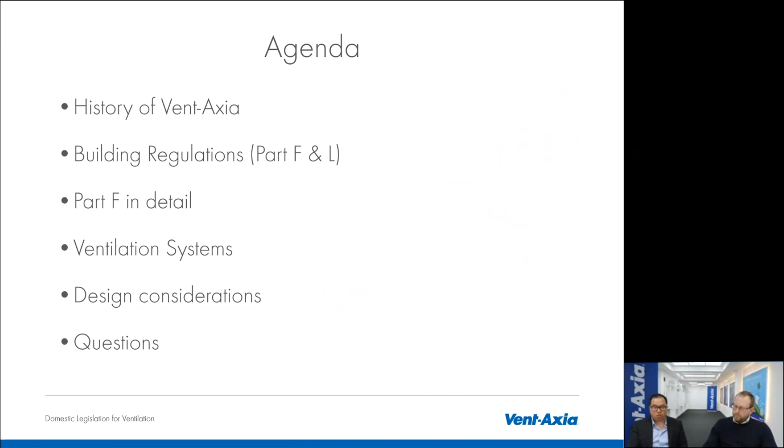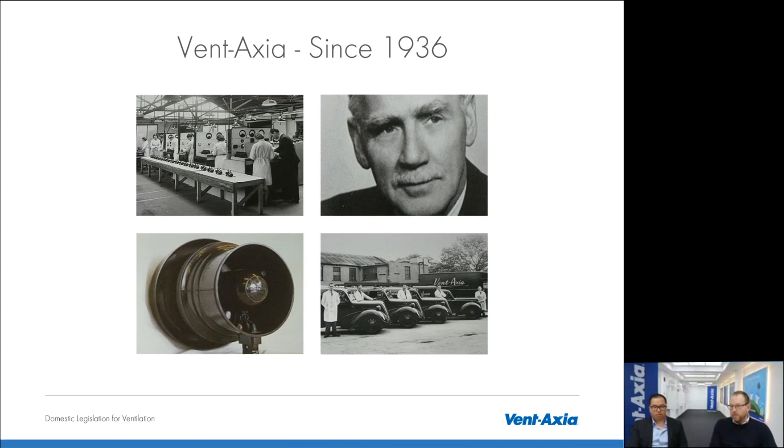And today, now called Vent-Axia, we continue to improve the indoor environment for our customers. Vent-Axia is a proud UK manufacturer, producing products across 3 UK sites for the UK and export markets, with our goal of improving the indoor air quality for our customers. Our manufacturing facilities across the UK are located in Crawley, Dudley and Reading.

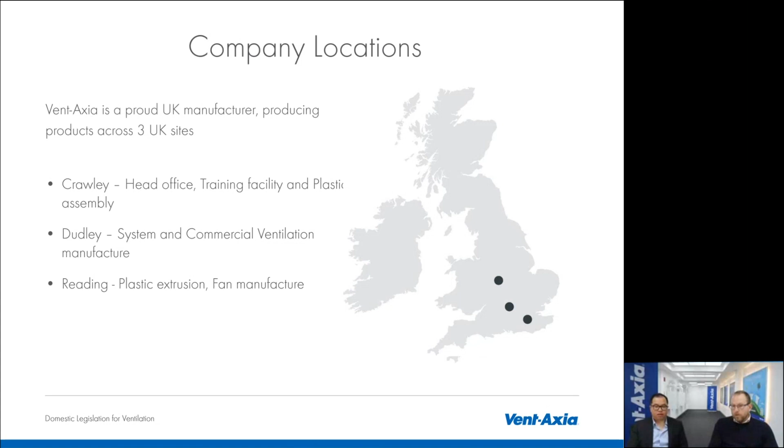Historically, building regulations across the United Kingdom were combined, but this has now changed to having each constituent country have their own versions of the building regulations. England were the first to publish their latest building regulations. We expect the other countries to follow shortly, with each now having finished their consultation periods, and we look to publish their documents within the next year. Once these are published, we will look to update this presentation to include them.

Moving on to the building regulations, specifically Part F for ventilation and Part L for conservation of fuel and power, we'll be looking at Volume 1, which applies to dwellings, such as residential. There is also a Volume 2, which applies to buildings other than dwellings, such as commercial. This will be covered in a future webinar.

The new 2021 edition of Part F, L and O take effect on the 15th of June 2022 in England. This means any new applications following this date will need to meet the 2021 edition. Any applications made prior to this date will be applicable for a 12-month grace period which ends June 2023. Following this, each individual plot must follow these regulations in order to comply.

Historically, building regulations applied to each site, multiple houses, and this is now changed to being specifically applicable to each plot, i.e. individual houses. This means that if a site designed to previous regulations hasn't started every plot by 2023, any remaining plots would need to be redesigned to meet the 2021 edition.

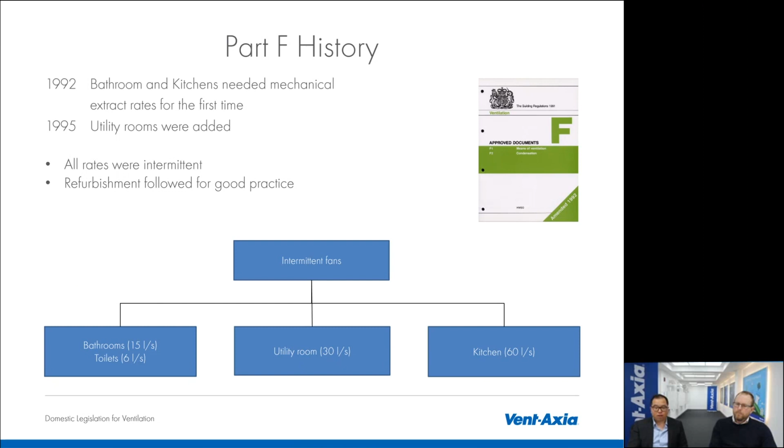This not only applied to new build developments, but refurbishment projects also follow this document as good practice if building control was involved. The minimum extract rates meant that generally, to suit application, 100mm diameter fans were used in bathrooms and toilets, and 150mm fans were used in utility rooms and kitchens.

In 2006, Part F introduced continuous whole house ventilation systems and became more focused around performance. There were 4 different types of systems that would meet this compliance: intermittent fans and background ventilators, known as System 1, passive stack, known as System 2, mechanical extract ventilation, known as System 3, and finally, mechanical ventilation with heat recovery, known as System 4.

Part L, conservation of fuel and power, was also introduced. This gave rise to fan systems having minimum specific fan power requirements, starting to drive energy efficiency into the systems. Part L was split into L1A for new builds and L1B for refurbishments.

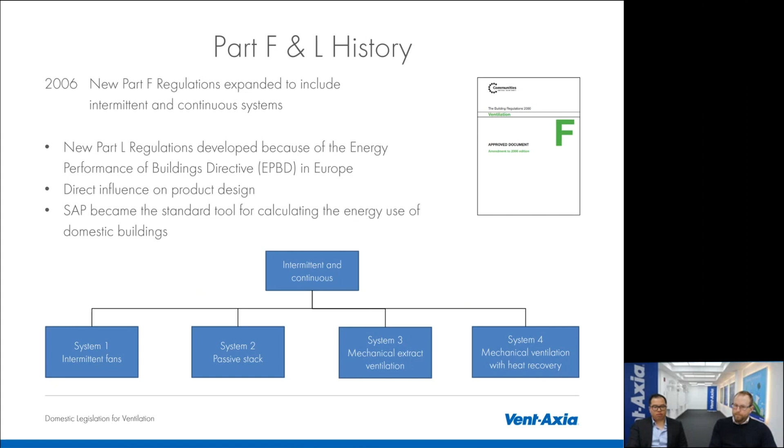In 2010, Part F was updated to include reference to the Domestic Ventilation Compliance Guide, which introduced a requirement for commissioning of systems and compliance documentation, creating a more stringent process for ventilation. Part L, heat recovery efficiencies were increased, minimum SFP targets were lowered, pushing for further energy efficient systems. Alongside this, there were also industry guides and good practice guides to ensure compliance and best practice was followed for installations.

With the introduction of the 2021 edition, the main focus is health and energy efficiency, which we see as a positive move following the COVID-19 pandemic. The regulations look at minimising entry of external pollutants, ensuring humidity and pollutants are extracted effectively and efficiently, and setting minimum levels of fresh air to ensure good occupant health. The approved document references a number of industry guides and codes of practice and standards published by organisations such as CIBSE and BRE.

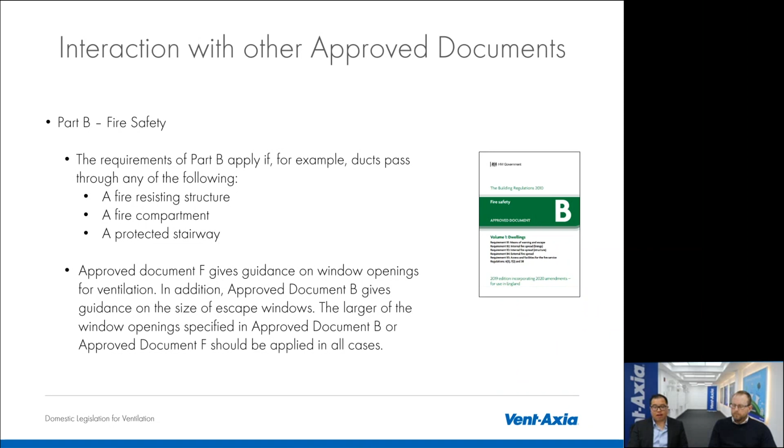Approved document F interacts with other approved documents. Part B is all about fire safety. This applies to ducting and penetrations through walls and fire structures. Part B also gives guidance on escape windows and openings, which may well be larger than those required for ventilation in Part F and should take precedence. If in doubt, always consult the fire officer.

Interaction with Part J, which covers combustion appliances and fuel storage systems. Part F cannot supersede Part J when permanently open air vents are required for combustion, as ventilation fans may cause combustion gases to spill from open flued appliances.

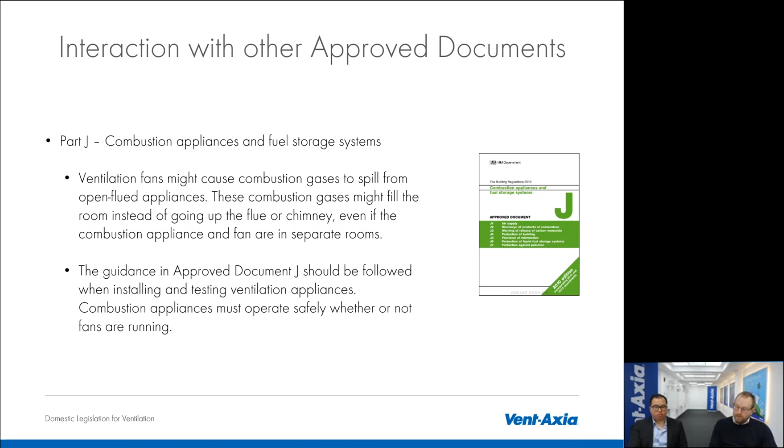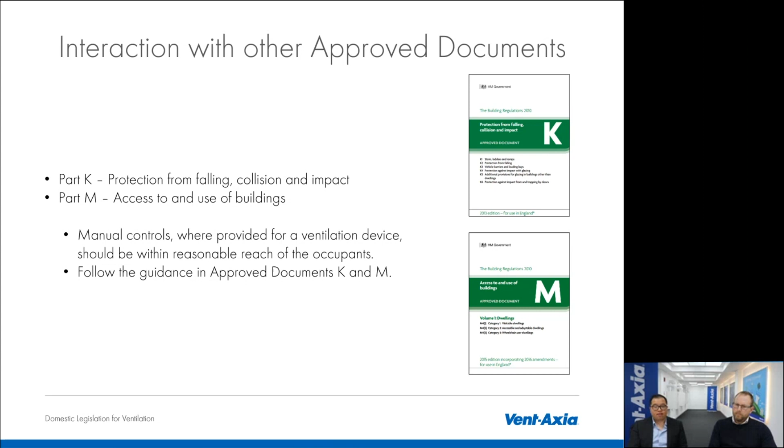Interaction with Parts K and M, which cover protection from falling, and access to and use of buildings, which states that controls should be within reasonable reach of occupants.

And finally, Part O, which covers overheating. This is a new approved document introduced in December 2021. This can impact the purge ventilation rates, which may exceed those found in Part F to manage the rapid dilution of pollutants. The higher of the two standards should be followed.

There is also a manual to the building regulations, which provides further history and guidance on the various interactions across all the approved documents.

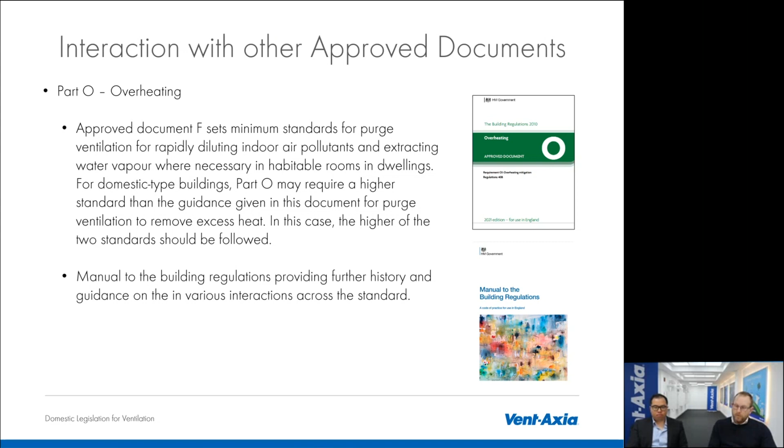We now move on to the details of approved document F, volume 1. The various ventilation systems within Part F are no longer classified between the systems 1 to 4.

So there are now 3 types of prescribed ventilation systems, with passive stack now removed. Other systems, such as positive input ventilation, also known as PIV, may be used to comply, but expert advice should be sought.

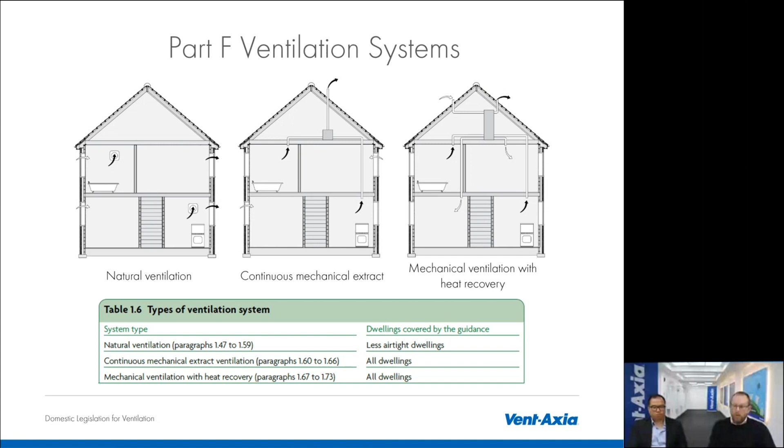In the drive to reduce the energy consumption of buildings, focus has been around improving the fabric insulation levels, reducing heat loss through ventilation, and increasing the building air tightness. How airtight the building is has an impact on its energy use, and these changes to the guidance introduce the requirement that all buildings must be air tightness tested.

As per approved document F, houses are now classified as less airtight or highly airtight, depending on the air permeability, which is measured using metres cubed per hour per square metre.

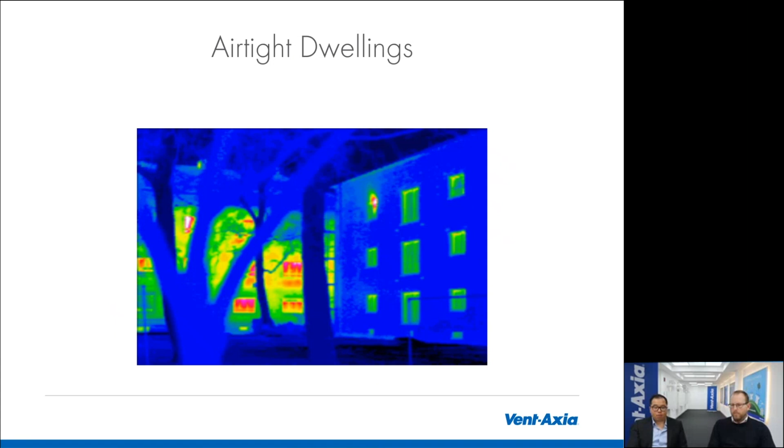The minimum air tightness of a building is 8 metres cubed per metre squared at 50 pascals, which is reduced from 10 in the previous guidance. If the air tightness is greater than this, the building will not comply.

If a dwelling designed with natural ventilation tests as highly airtight, which is an air permeability of 3 or less, expert advice should be sought, or a continuous mechanical extract ventilation should be installed.

We recommend that intermittent extract fans be used between 8 and 5, with decentralised mechanical extract ventilation systems between 5 and 3, and anything below 3 should be mechanically ventilated with heat recovery.

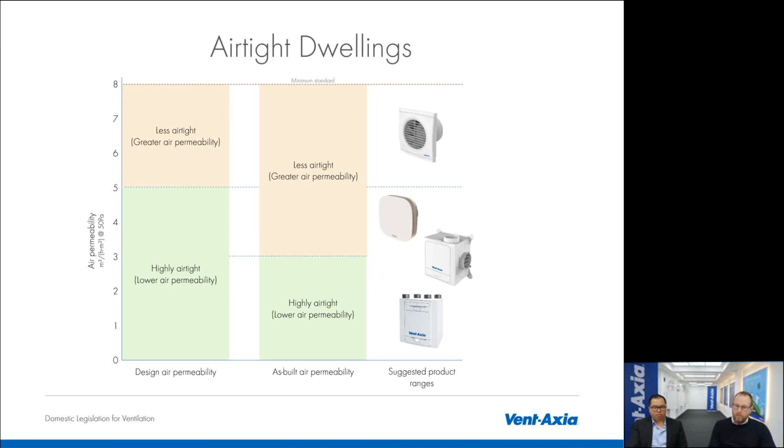The minimum intermittent and high extract rates between the 2013 and 2021 editions remain unchanged and are presented within Table 1.1 and 1.2. For intermittent systems, these are 60 or 30 for a kitchen, 30 for a utility, 15 for a bathroom, and 6 for a toilet.

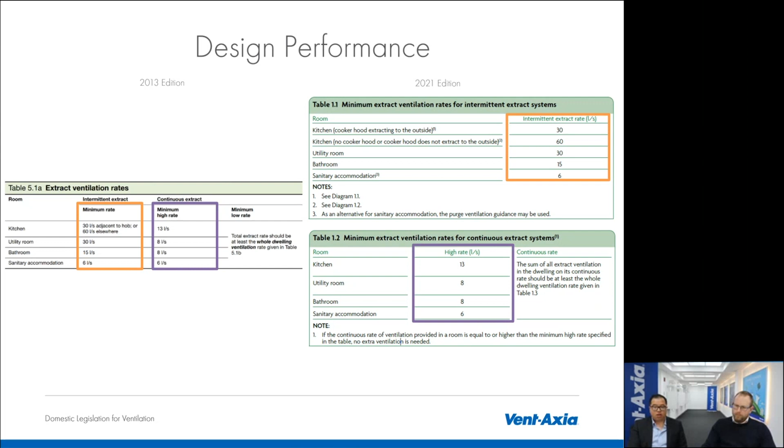For continuous systems, these are 13 for a kitchen, 8 for a utility or bathroom, and 6 for a toilet.

These new figures are based on 2 occupants in the master bedroom and 1 in subsequent bedrooms. In addition to these changes, the minimum ventilation rate should not be less than 0.3 litres per second per metre squared of internal floor area, including every floor. The higher of the 2 values calculated should be used.

If the house rate exceeds the high extract rate, there is no specific requirement for boost speeds to be increased above the whole house rate, but dependent on various factors such as lifestyle, you should consider a minimum of 10% boost. Also to note, one habitable room, for example a bedsit or studio, would fall under one habitable room and would need to meet the minimum ventilation rate of 13 litres per second.

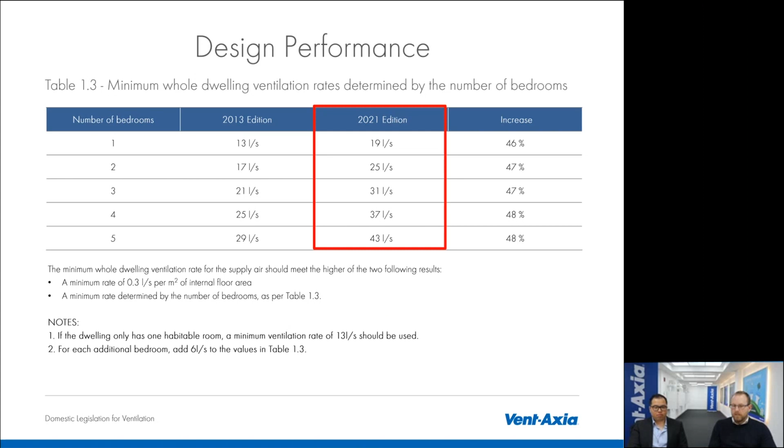There continues to be a requirement to have a summer bypass and variable speed control for supply and extract ventilation systems. Within SAP, the notional buildings will use natural ventilation with intermittent extract fans.

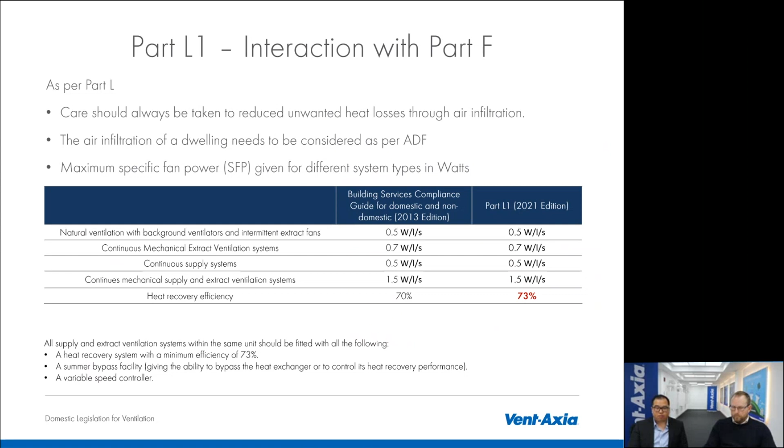Natural ventilation with background ventilators and intermittent extract fans is suitable for less airtight dwellings, formerly known as System 1. Intermittent extract fans should be fitted in all wet rooms with correctly sized background ventilators, also known as trickle vents.

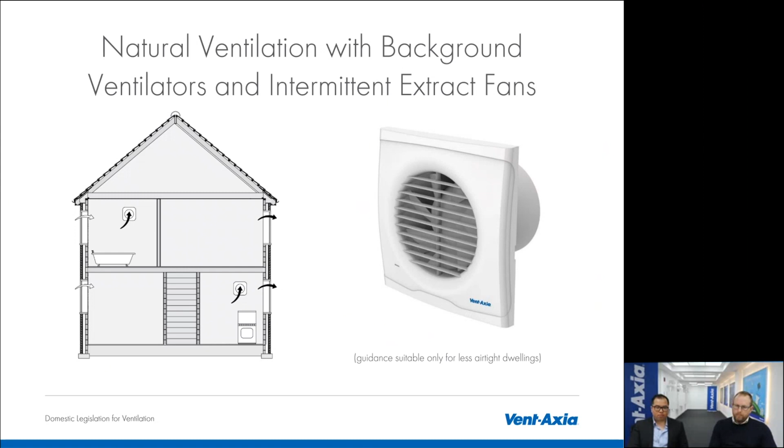Here is an animation of natural ventilation. As you can see, there are background ventilators which allow air to infiltrate into the building. In this example, they are integrated within the windows. Intermittent extract fans are located within the wet rooms, the bathroom and the kitchen, and are only operated either by manual override or automatic controls, such as an integral humidity sensor. These then allow the moist and stale air to be extracted to the outside.

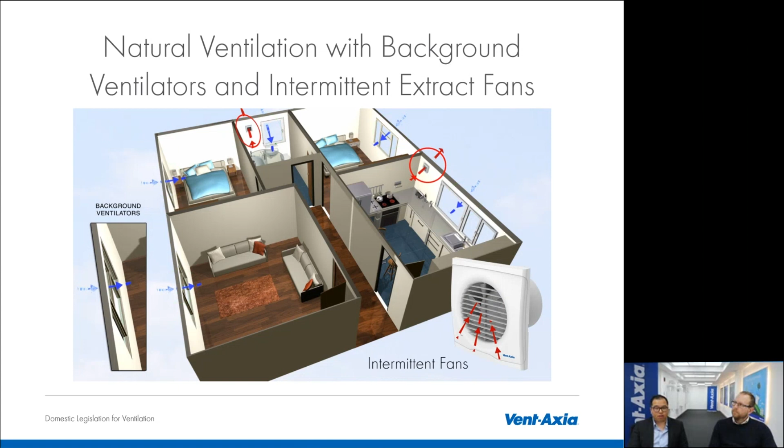Extract rates are unchanged, but key points to be aware of: if a wet room has no external wall, the fan should extract at 4 air changes per hour in order to meet the Purge Ventilation standard. It should be noted that for larger wet rooms, this may exceed the minimum extract rate. For example, an internal bathroom of 15 meters cubed would need a minimum intermittent rate of 60 meters cubed an hour or 16.7 liters a second.

Any automatic controls, such as humidity control, should have a manual override to allow occupants to turn the extraction ventilation on or off. And if no windows are present, the fan should be provided with controls which continue to operate for at least 15 minutes after the room is vacated.

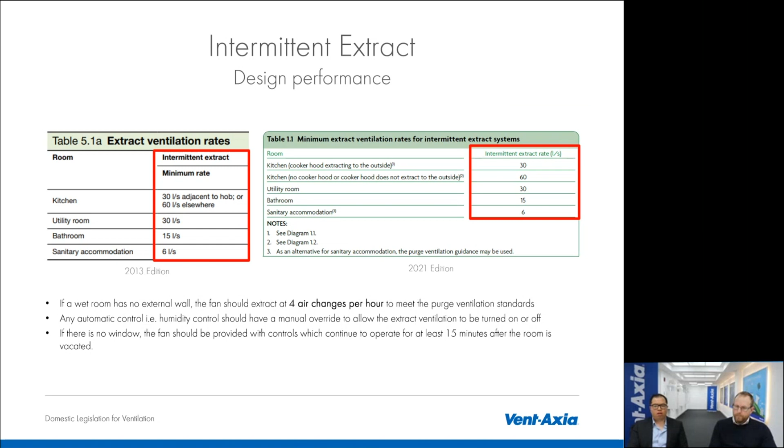Background ventilators are now defined by single-story or multi-story. There is a 20% increase in area for habitable rooms and a 60% increase in area for kitchens. Fans and background ventilators should be at least 500 millimeters apart if installed in the same room, and if an external facade faces an area of sustained and loud noise, an attenuating background ventilator is needed.

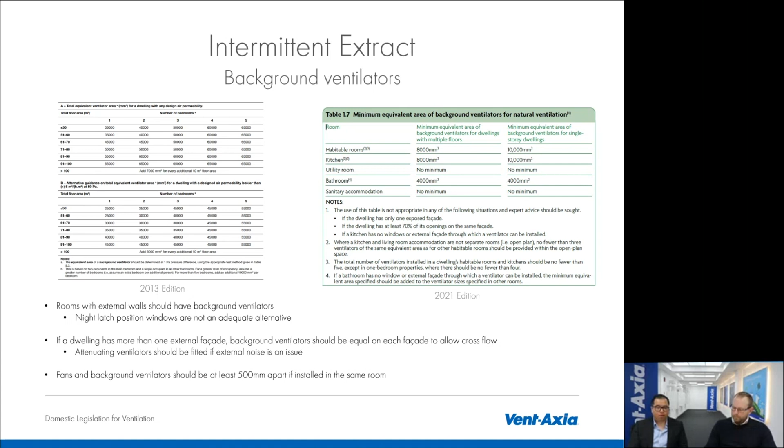The key note to be aware of is that background ventilators are not recommended in dwellings with only one exposed facade, or if a dwelling has at least 70% of its openings on the same facade. This will mean that apartments will likely need to move towards mechanical extract ventilation or mechanical ventilation with heat recovery.

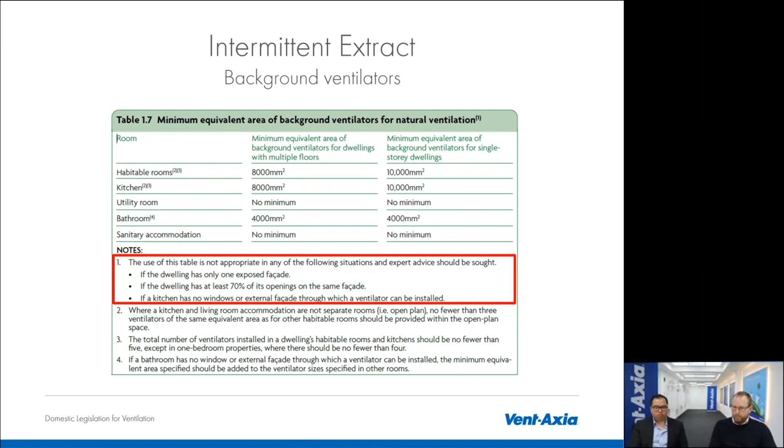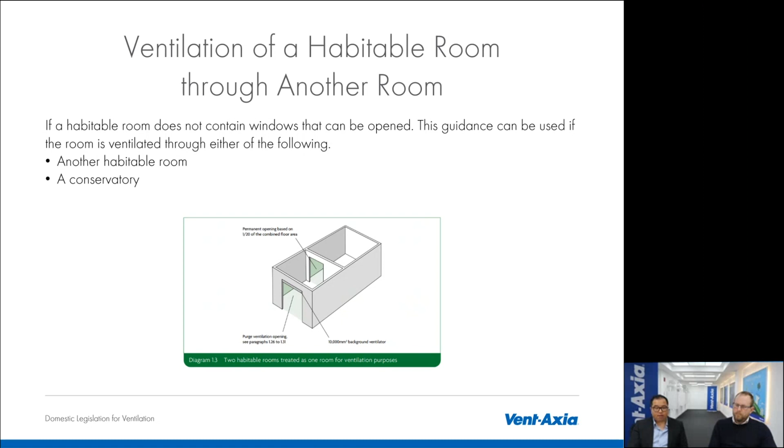If there is a habitable room that does not have any windows, you will need to ventilate through another room. In order to comply with this, there should be a permanent opening between the two rooms of at least 1/20th of the combined floor area of the two rooms. A background ventilator of at least 10,000 millimeters squared equivalent area, and purge ventilation, should be present. This will also apply to continuous mechanical extract ventilation.

A system for purge ventilation is required in each habitable room to remove high concentrations of pollutants from occasional activities, for example painting. Purge ventilation should be capable of extracting a minimum of 4 air changes per hour per room directly to outside. Purge ventilation should be delivered through either openings such as windows or doors, or a mechanical extract system. Where purge ventilation is delivered through openings such as windows in a habitable room, the minimum openable areas specified in table 1.4 should be achieved.

There are minor changes compared to the 2013 editions, where previously it distinguished between doors and windows. These have now merged into the table we now know as 1.4. Purge ventilation applies to all ventilation system types within Approved Document F.

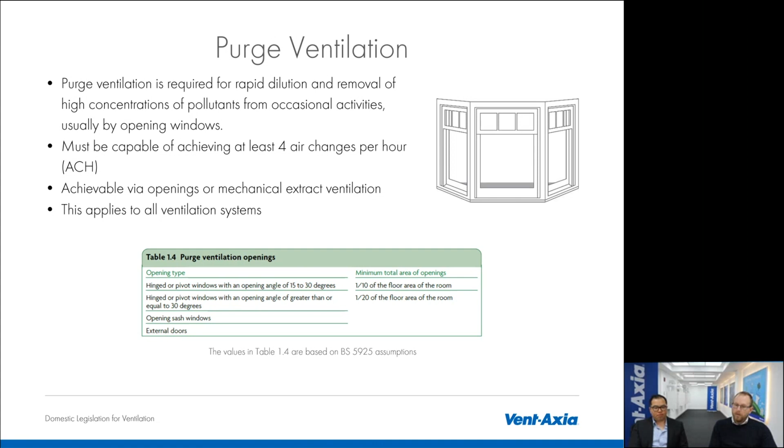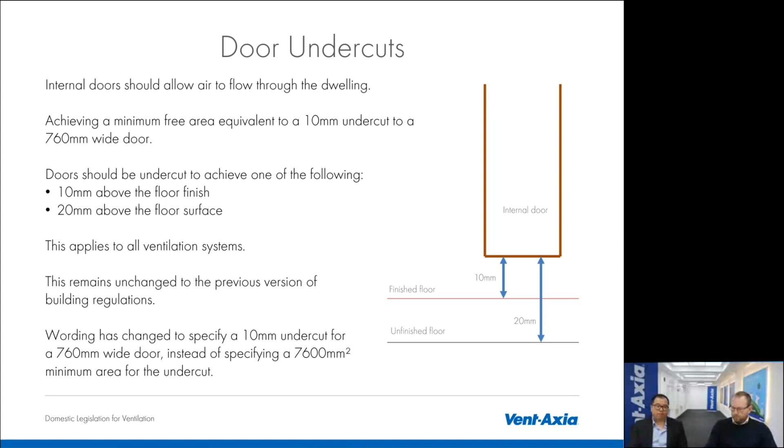We move on to the next type of ventilation system, which is continuous mechanical extract ventilation, which can be achieved through two different types of system or a combination of such: decentralized mechanical extract ventilation (DMEV), which is a standalone continuously running extract fan installed within the wet rooms, or continuous mechanical extract ventilation (MEV), which is a remote fan installed in a loft or cupboard which continuously extracts air from the wet rooms via ductwork. There is no opportunity for heat recovery with either decentralized MEV or centralized MEV.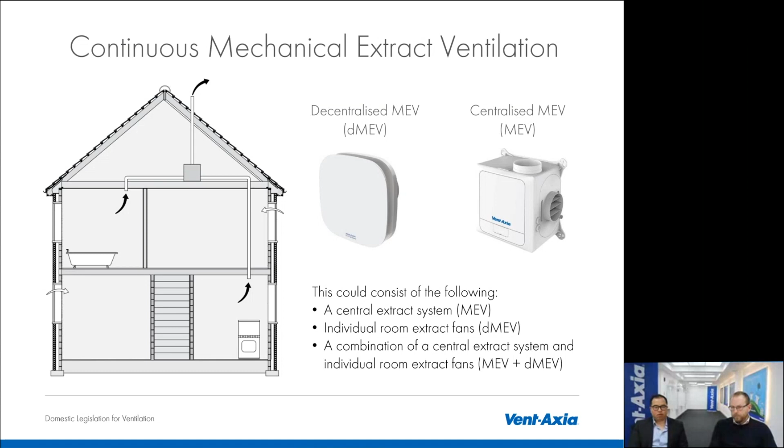Here is an animation of decentralized mechanical extract ventilation. Similar to intermittent extract fans, there are background ventilators which allow air to infiltrate into the building. Please note these are only installed within habitable rooms and not the wet rooms. With the constant running fans located in the wet rooms, these fans operate constantly at a lower speed to ensure consistent removal of moist and stale air.

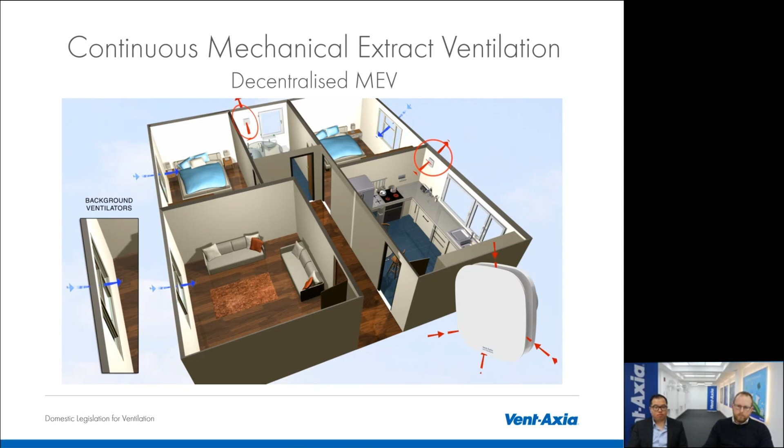Here is an animation of a centralized mechanical extract ventilation system. Again, we have background ventilators which allow air to infiltrate the building. Valves and ductwork are located within the wet rooms, which allow the MEV to draw the moist and stale air through the ductwork and then to outside.

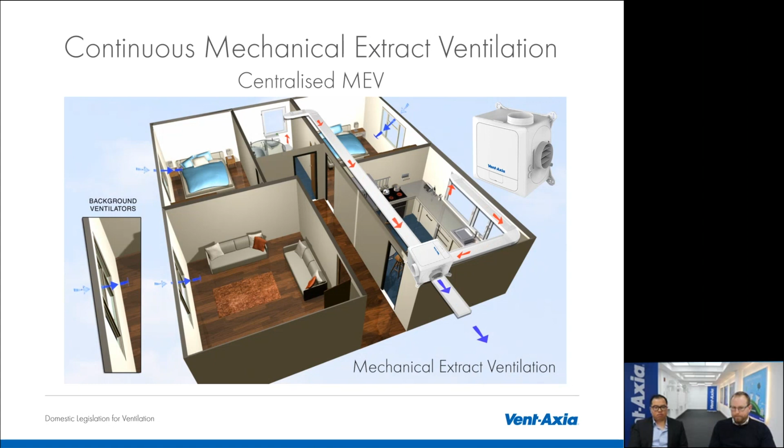For MEV and DMEV systems, we have to look at a high boost rate and also a continuous rate. The minimum high extract rate is defined in litres a second for each of the wet rooms. For kitchens, it's 13 litres a second. Utility and bathrooms are 8 litres a second, and in sanitary accommodation, 6 litres a second.

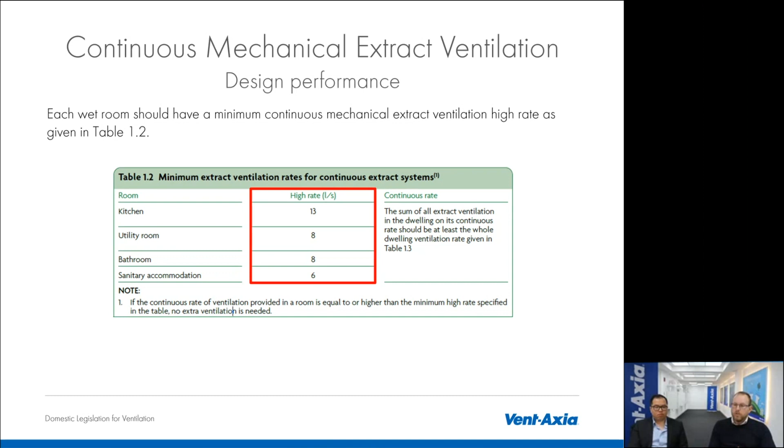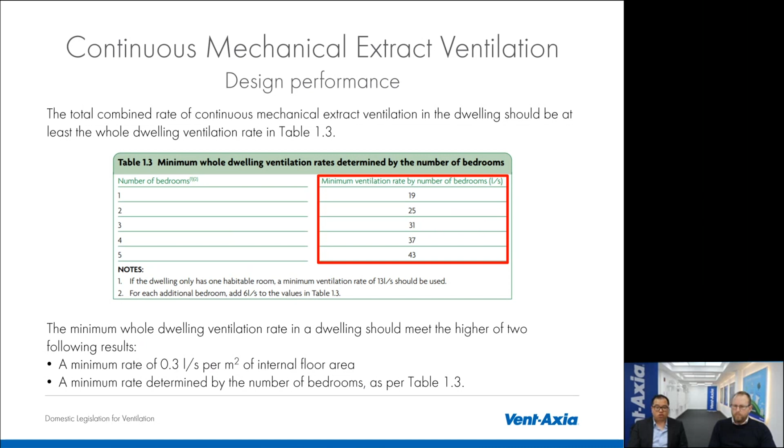The continuous extract rate has to be calculated in 2 ways, and the larger of the 2 volumes will be used. Step 1 is to obtain the rate from the number of bedrooms. Step 2 is to multiply the total floor area of the property by 0.3 litres per second. Should the continuous rate be higher than the minimum high rate, then the continuous rate should be used for the boost as well. There is no need to increase the speed to give any additional boost. However, dependent on various factors, such as lifestyle, you should consider a minimum of plus 10% boost.

Background ventilators should be installed in the habitable rooms, but should not be installed in the wet rooms. When installed in each habitable room, they should have a minimum size of 4,000 millimeters squared. It should be noted that there needs to be a minimum number of ventilators in the property, which equals the number of bedrooms plus 2.

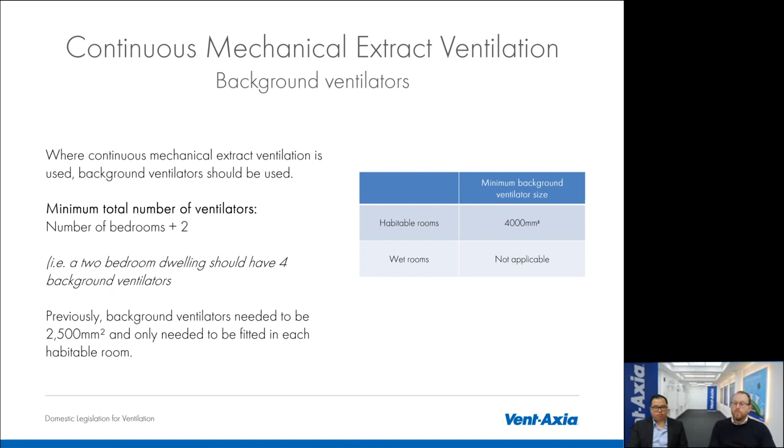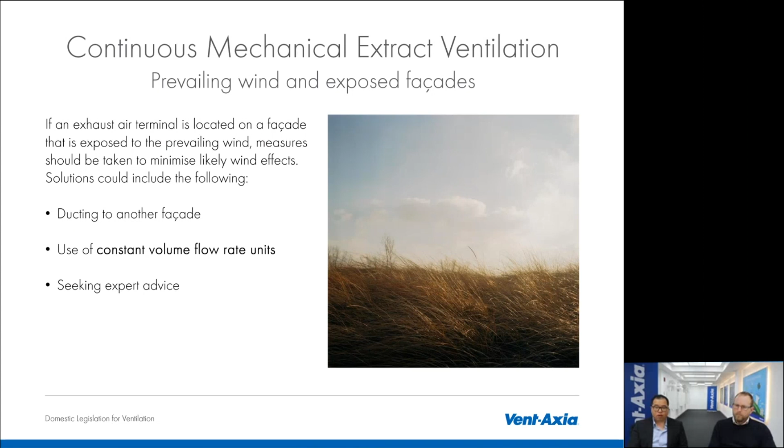A point to consider is prevailing winds and exposed facades. This can be combated with any of these points. The best solution is to use constant volume fan units in scenarios where ducting to an alternate facade is not practical.

We move on to the final ventilation type within approved document F, which is mechanical ventilation with heat recovery, MVHR. MVHR is a whole dwelling ventilation system that supplies and extracts air continuously at a low rate, with the option to increase airflow rates for boost as and when required.

The unit is typically installed in a loft space or a cupboard and is connected onto rigid ducting, which supplies fresh filtered air to the habitable rooms and extracts stale polluted air from the wet rooms. The unit incorporates a polymer heat exchanger that recovers energy from the stale moist air and tempers the incoming air before it is delivered into the habitable rooms.

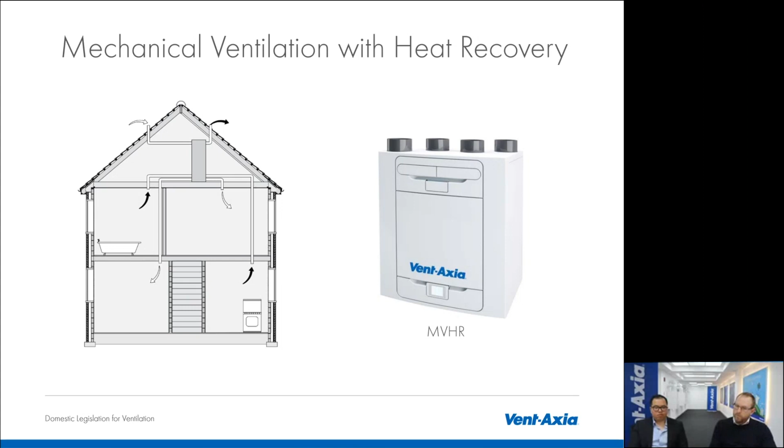Unlike intermittent extract and continuous mechanical extract, background ventilators are not required. Stale and moist air is removed from the wet rooms via the ductwork, which is then extracted to the outside. Simultaneously, fresh air is drawn in from the outside, passes through the heat exchanger where it recovers energy and is then supplied to the habitable rooms. We recommend that the ductwork that is from the unit to atmosphere or installed within an unheated space is insulated to prevent condensation forming.

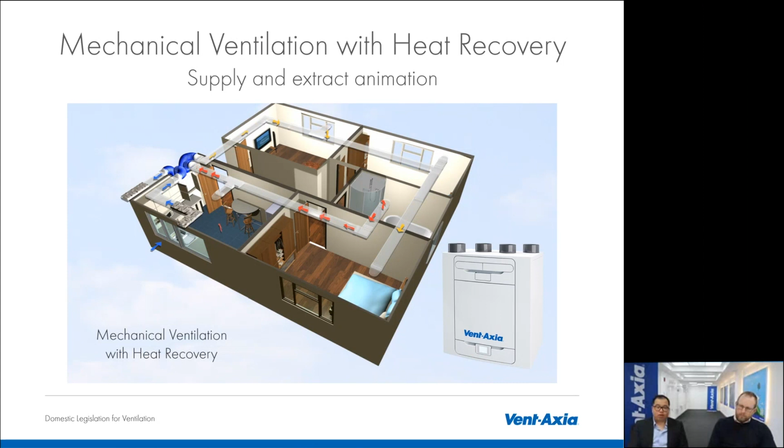For an MVHR system, we have to look again at the high boost rate and also a continuous rate, just as we did for the MEV and DMEV systems. The minimum high extract rate is again defined in litres a second for each wet room. Kitchen, 13 litres a second, utility and bathroom, 8 litres a second, and the sanitary accommodation again, 6 litres a second.

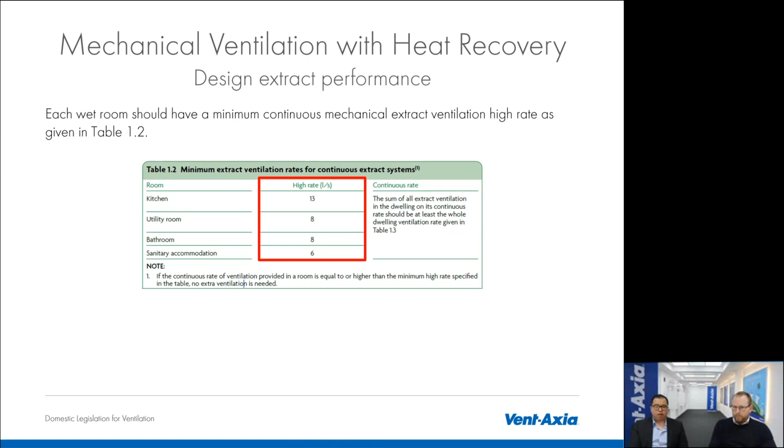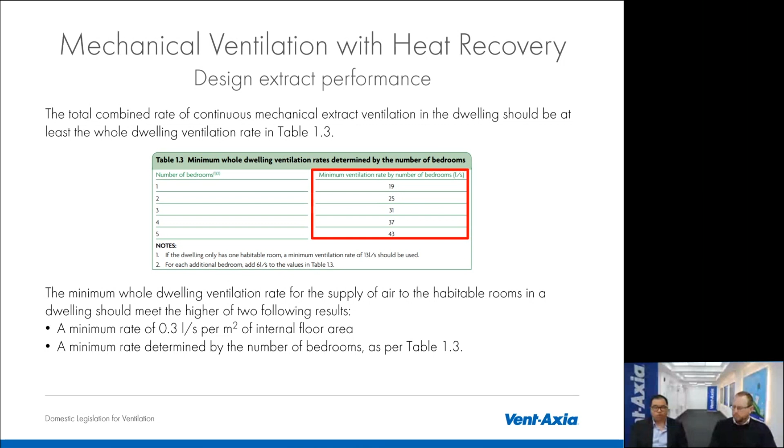Here we repeat the slide from mechanical extract ventilation, where the continuous supply and extract has to be calculated in 2 ways, and the larger of the 2 volumes will be used. The total supply airflow rate should be equal to the total extracted airflow rates. This will allow the system to be balanced, meaning the amount of stale air extracted from the wet rooms is replaced with the fresh tempered air into habitable rooms. This applies to both the continuous rate and the boost high rate. This needs to be achieved by proportionally distributing the airflow rate into each habitable room.

Please note that background ventilation should not be installed with mechanical ventilation with heat recovery, as they can provide unwanted additional ventilation and reduce the system efficiency. MVHR should be designed to avoid the moist air from wet rooms recirculating into the habitable rooms.

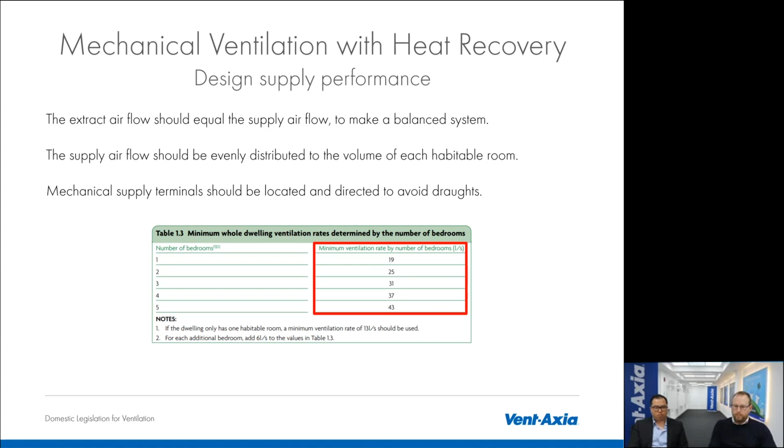Part F shows examples of ventilation systems that comply. Alternative ventilation systems, such as positive input ventilation (PIV), may be used provided it can be shown to have an equal level of performance. This may be demonstrated through expert guidance, including BBA certification or following BSI PAS 2035, which is considered an adequate means of demonstrating compliance.

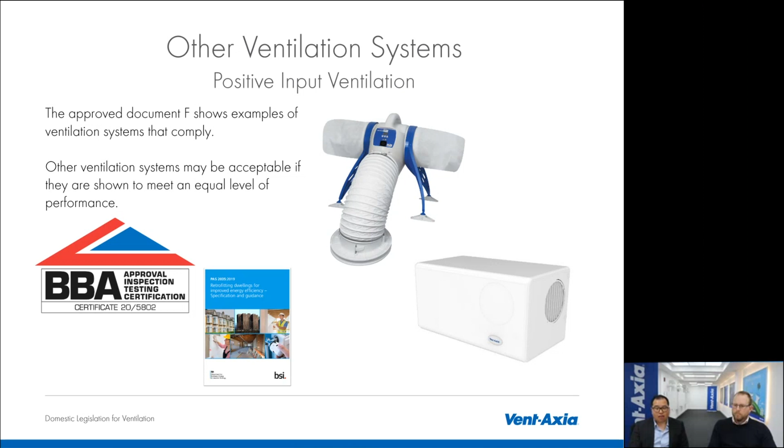We now move on to design considerations.

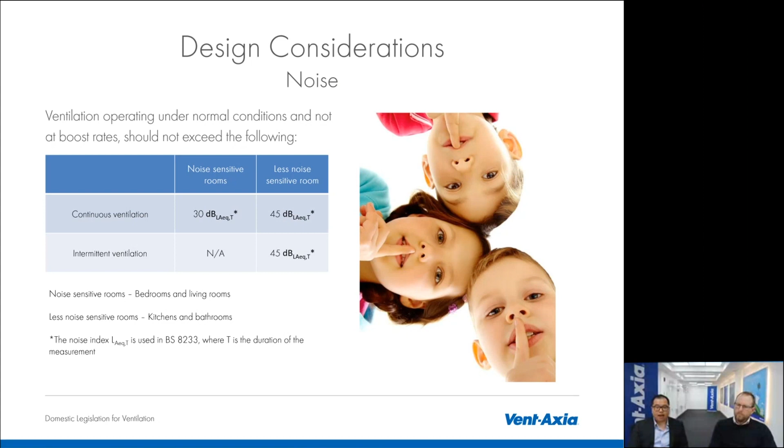Noise is an important consideration, as noise pollution can be a concern within dwellings. Part F states certain noise levels that should not be exceeded under normal operating conditions, not boost rates. Noise should not exceed 30 decibels within bedrooms and living spaces, and cannot exceed 45 decibels within kitchens and bathrooms.

To counter noise from units, various ancillaries can be installed, such as attenuators, which can be used to reduce in-duct noise in certain rooms or the entire system. We have acoustic enclosures, which reduce breakout noise from the casing of the unit, and acoustic top boxes, used to reduce overall in-duct noise from MVHR units, which also provide a neat ducting enclosure at the point of installation. Usually, a combination of these will be used to maximise sound reduction.

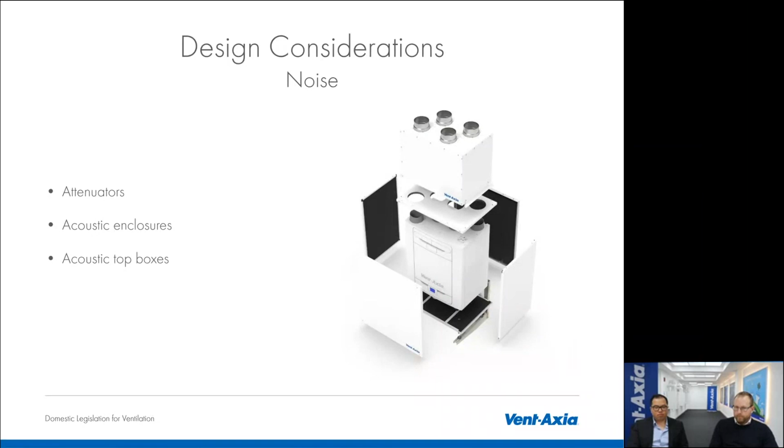As with sound, the location of the property can affect the level of pollutants drawn into the building, either through trickle vents or supply ventilation. Section 2 of Approved Document F states that ventilation systems should be designed to minimize the intake of external air pollutants. In an area of high pollutants, this will likely only be achieved by use of MVHR systems with high-grade filtration. Further information can be found via CIBSE's TM64 and TM40. Further expert advice should be sought during periods of high pollution concentration.

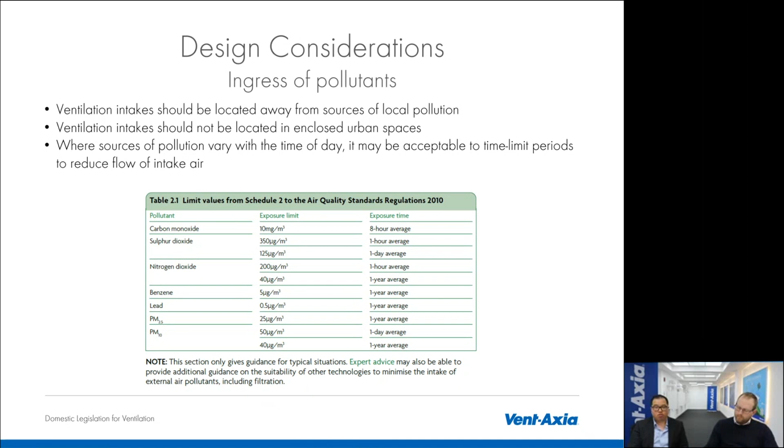NOx filtration may need to be considered on city centre developments or where lower level dwellings are next to busy carriageways, applicable only to systems that provide supply air rather than background ventilation. It should be noted that adding such filters will add to the pressure in the system, and these filters will need access for routine maintenance.

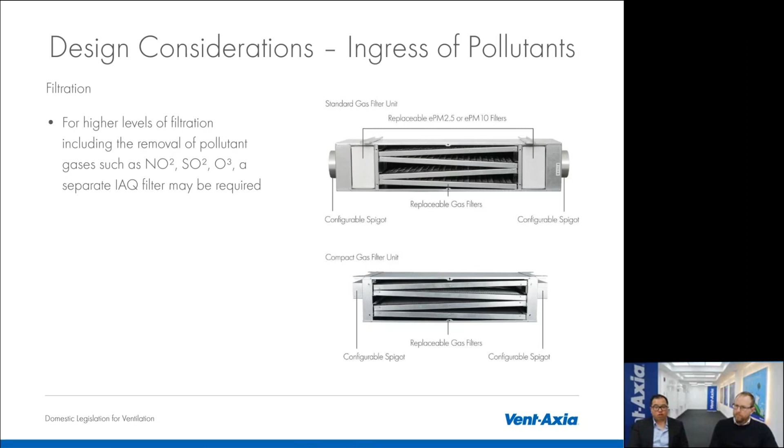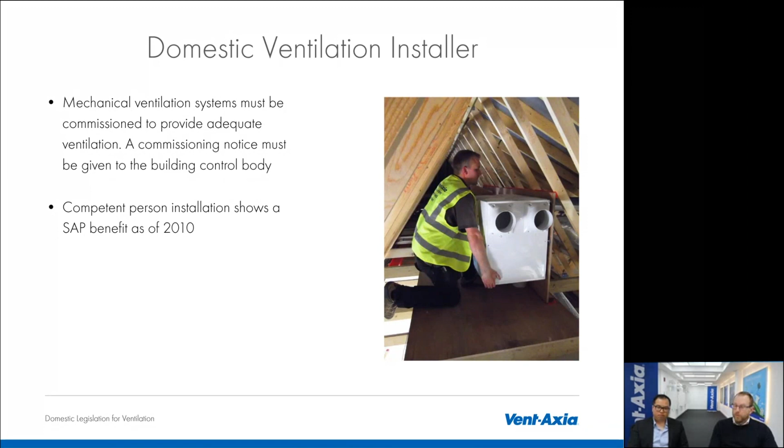Within Approved Document F, there are requirements to meet for installation and commissioning. Mechanical ventilation systems must be commissioned by a competent person and notice given to the building control body. There is also a SAP benefit when the ventilation system has been installed by a competent person. To become a competent person, you can attend a training course, for example a NICEIC domestic ventilation course, delivered by various training suppliers and Vent-Axia at our dedicated training facility in Crawley.

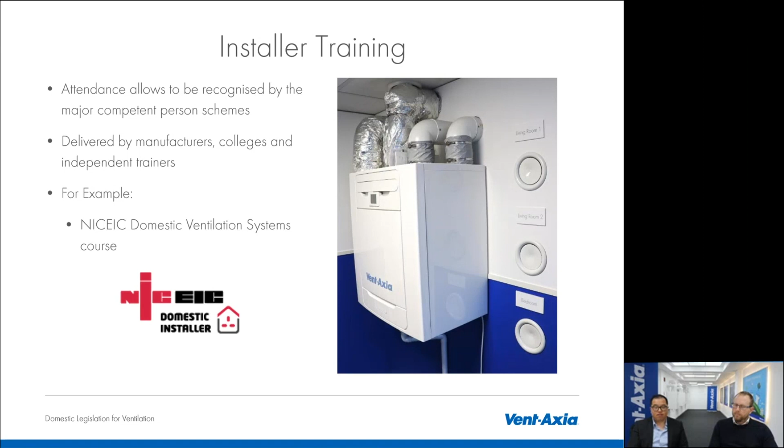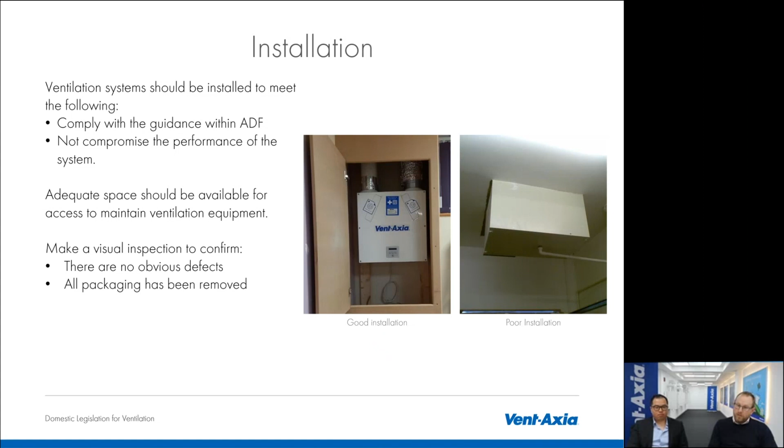An installation comprises many components, many of which are specified within Part F. Part F states that the system must be accessible to maintain the equipment and ensure there are no obvious defects and all packaging has been removed. To the right is an example of a good installation where the unit is accessible, compared to a poor installation where the unit is not.

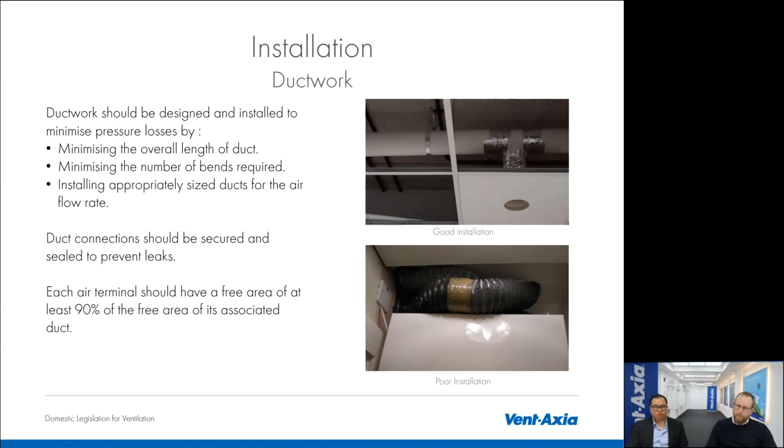Flexible ductwork should be kept to a minimum and kept taut, not sagging or with any tight bends, to ensure system efficiency is improved. As you can see from the images, ductwork should be straight and have long sweeping bends where possible, not tangled with multiple bends as per the image.

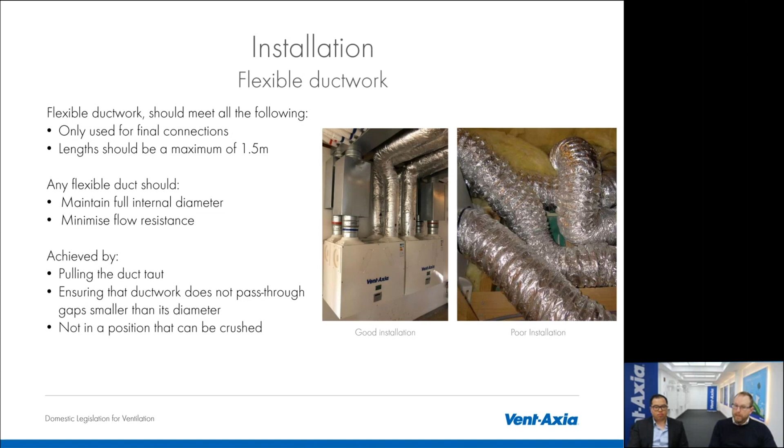Airflow rates of all installation systems should be tested and recorded within the commissioning checklist. Correct equipment should be used to measure the airflow rates, which is an airflow device calibrated within the last 12 months at a calibration centre accredited by UKAS.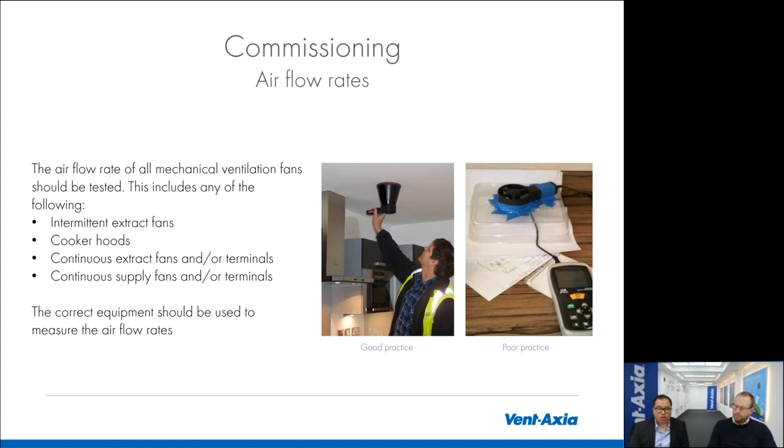In some scenarios, the configurations may prevent airflow from being measured. In these cases, we will need to determine the airflow rates as per the manufacturer's guidance.

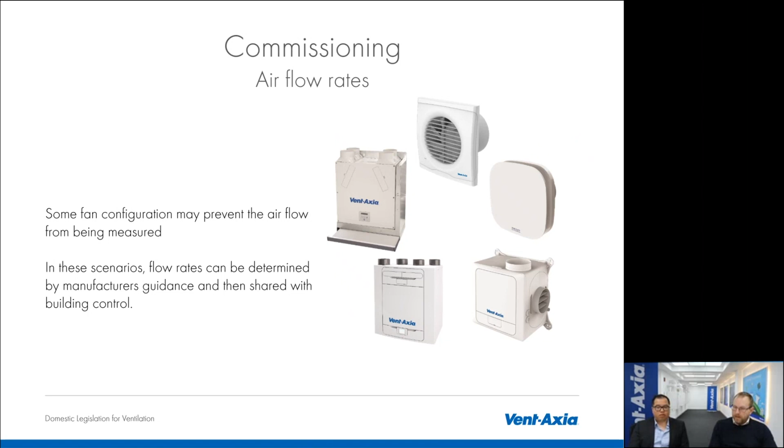As per Part F, there is a compliance checklist that needs to be completed, which was previously part of the Domestic Ventilation and Commissioning Guide. This can be found within Appendix C, and Part 1 is shown on the slide. Part 1 contains the particulars of the system, address and installer's details. Part 2A is an installation checklist. Part 2B is a visual inspection or pre-commissioning checklist. Part 3 is for recording airflow measurements from fans. All sections will need to be completed to demonstrate compliance.

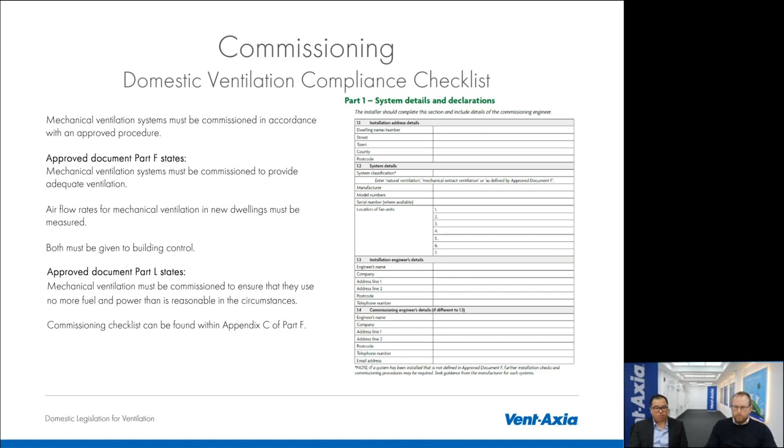ADF and L now require a user guide to be provided to the homeowner in the handover pack. It needs to be a non-technical overview for occupiers and should include basic details on the operation and maintenance of the system. Vent-Axia offer a full suite of homeowner guides which can be used to fulfill this requirement.